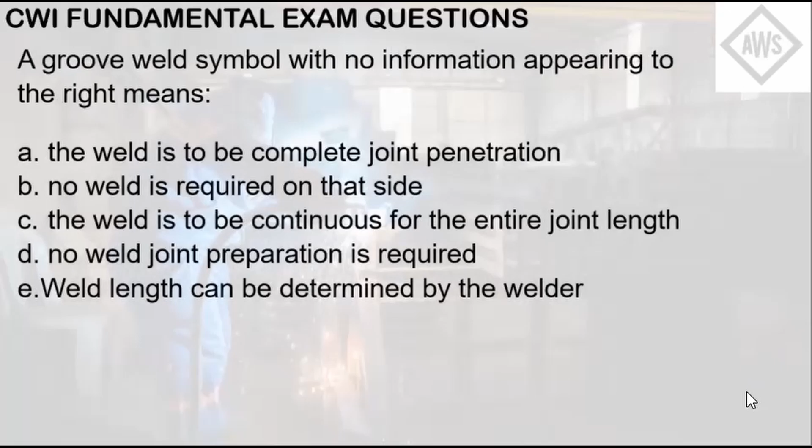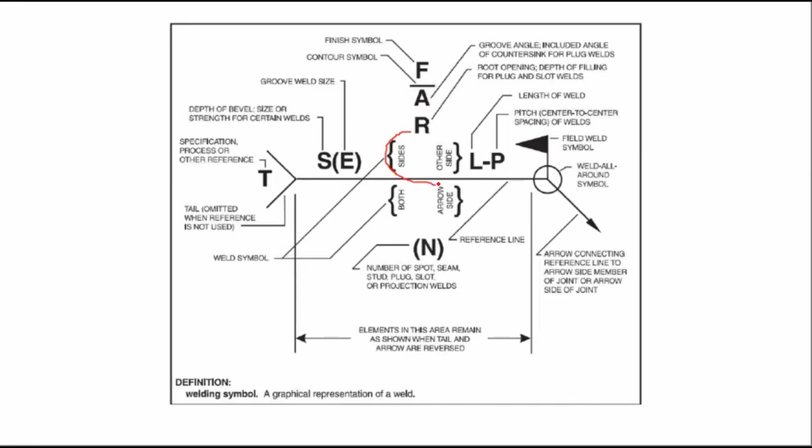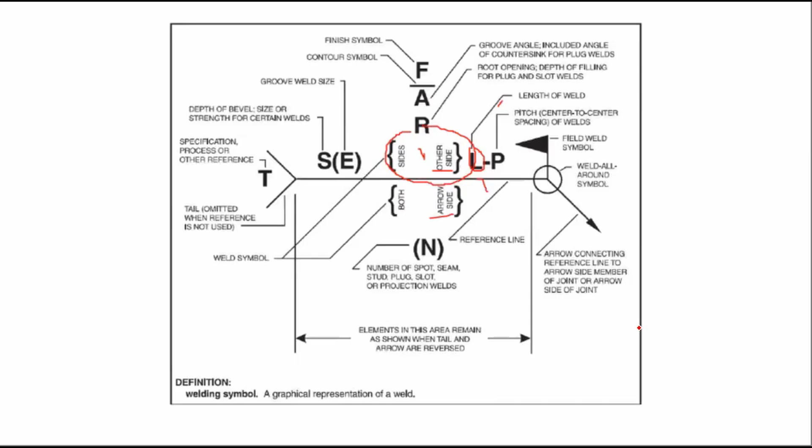As you can see here, the weld symbol is right up in the center. The weld symbol will appear mainly if the weld is on the other side of the joint or the arrow side of the joint. This is the center right here. If you look at the weld length of the weld legend, it's labeled as L, which is the length of the weld. If this is omitted, the length of the weld can be assumed to be continuous for the entire length of the joint. So if you have a joint that is 3 inches, and the length of weld is not specified, then it is understood that the length of the weld is also 3 inches. The answer here is letter C, the weld is to be continuous for the entire joint length.

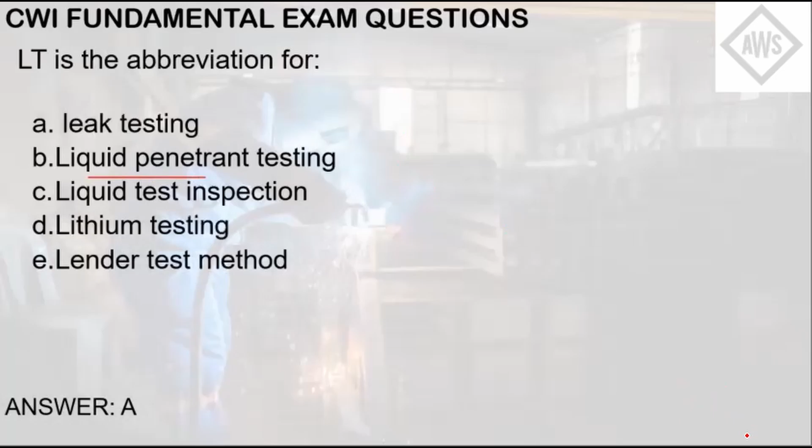So it might be confused with liquid penetrant testing, but the abbreviation for penetrant testing is PT. Leak testing is the answer here. It is a kind of nondestructive testing that fills the vessel or a pipe with a medium, commonly water. It may or may not be pressurized depending upon the testing requirements.

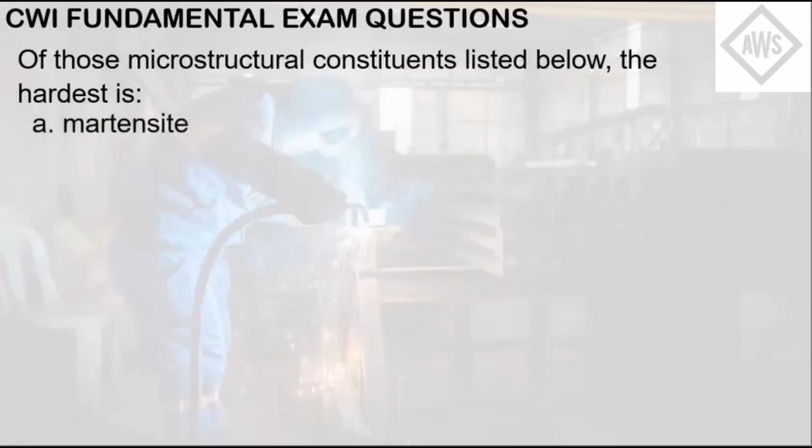Of those microstructural constituents listed below, the hardest is: A, martensite; B, ferrite; C, bainite; D, austenite; E, pearlite. So this question can best be answered if you understand this iron-carbon phase diagram. The question is pertaining to which one is the hardest. This is dependent upon the rate of cooling once the metal is heated.

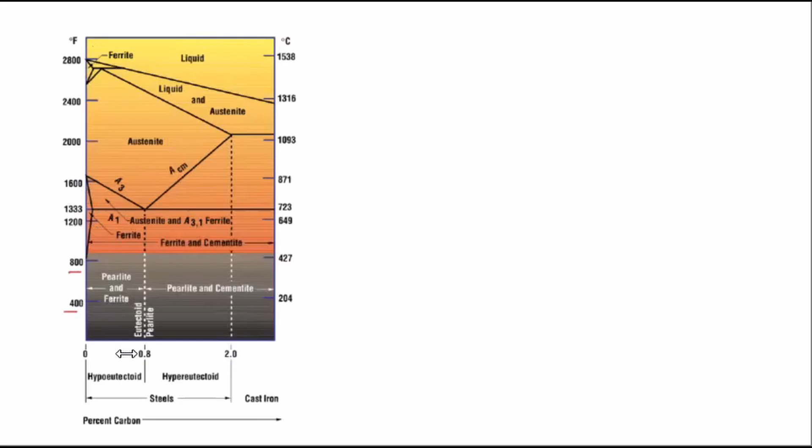So you can see here pearlite, austenite, and ferrite forming at different temperatures. The vertical part of the graph is the temperature. So depending upon their carbon percentage, pearlite and ferrite form at this range of temperature under these carbon percentages. So what about these choices?

Pearlite appears at a normal cooling rate, followed by bainite at a faster cooling rate, because the hardness of the metal depends upon the cooling rate to which it is subjected, and martensite at a very fast cooling rate, typically through a quenching medium. The faster cooling rates will produce a harder but more brittle material due to the reduced grain structure. So the answer here is letter A, martensite.

Filler metal specifications are found in which of the following documents? Letter A, AWS A5.1 through A5.30. Letter B, ASME Section II Part A. Letter C, AWS A3.0. Letter D, AWS A2.4. Letter E, AWS D1.1 Section 2. For the choices, letter B pertains to the forms of ferrous material products. So that is ASME Section II Part A.

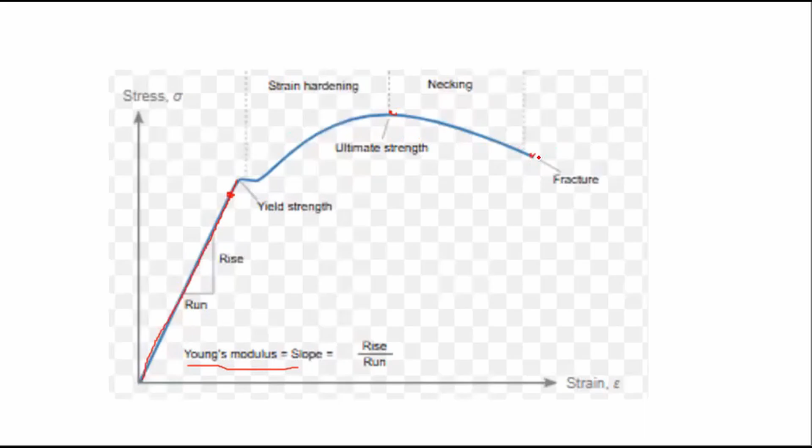All of these points can be determined in a tensile test because the material will undergo this entire stress-strain diagram process, since the tensile test will ultimately break the material up to fracture. So the answer here is letter E, all of the above.

Information that appears to the left of the weld symbol refers to: letter A, weld length; letter B, weld size; letter C, electrode size; letter D, number of passes required; letter E, none of the above.

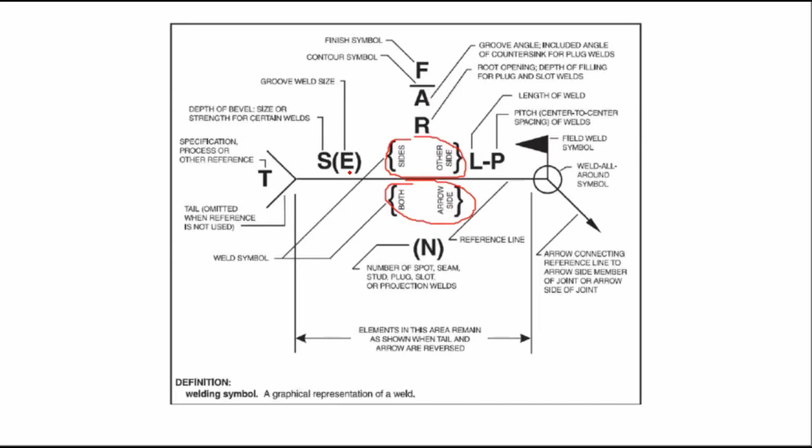So this question can be best explained as well with the diagram here. So the information that appears left of the weld symbol, so again, this is the weld symbol on the center of the welding symbol. So the parameter that appears to the left is the groove weld size or the size of the weld. So among the choices here, weld length appears on the right, so that's not the correct answer. The electrode size you don't specify in the welding symbol, as well as the number of passes. So the answer here is letter B, weld size.

After a rejected weld has been repaired, re-inspected, and found to be acceptable, the welding inspector should: letter A, change the original inspection report to indicate the part's acceptance. Letter B, mark directly on the part. Letter C, fill out a second inspection report. Letter D, tell the foreman to have the part moved to its next operation. Letter E, no further action is required.

So this question pertains to what the welding inspector will do if a rejected weld has already been repaired and found to be acceptable. So letter A, change the original inspection report to indicate the part's acceptance. So maybe this can be done, but this is not the ideal action for this scenario. Letter B, mark directly on the part. So this may be done if the part to be repaired has not been re-inspected yet, if it's yet to be repaired and the rejected weld has not yet been identified.

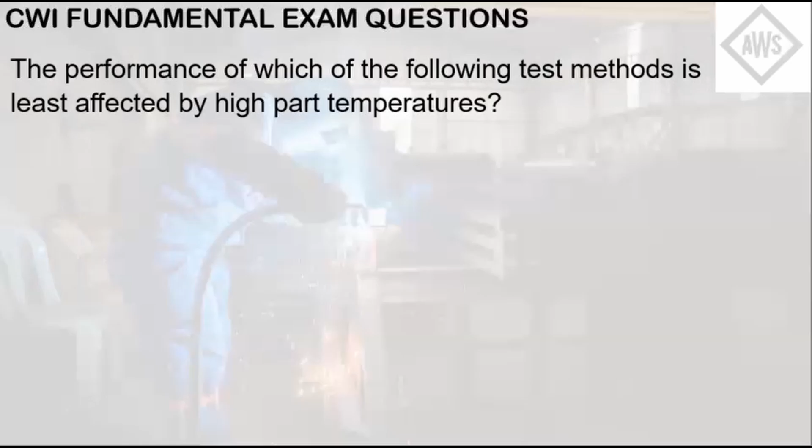The performance of which of the following test methods is least affected by high part temperature? So this question pertains to what testing method is least affected by high part temperature. So basically, after welding, you can expect that the base metal and the welded metal are subjected to a high temperature. So what testing method is least affected by it? Letter A, ET, letter B, RT, letter C, PT, letter D, UT, letter E, VT.

So ET stands for eddy current testing and does not need the probe to touch the metallic specimen. ET is done by a coil carrying AC and works by electromagnetic induction. So because of this, hot parts are facilitated and allowed. But the limitation of this testing is that highly skilled operators are required to operate and interpret the results. So ET is not affected by the high part temperatures of the weld and the base metal.

So for the other choices here, for RT, the high part temperatures can affect the result, especially PT and UT because of the need for contact of the couplant to the base metal or the welded part of the metal. You basically need to have the base metal cool off a bit for safety purposes as well, and of course for visual inspection.

So you need to have the metals cool off a bit. So the answer here is letter A. Since eddy current testing doesn't need contact with the base metal or the metallic specimen, this is the test method that is least affected by those high temperatures of the base metals.

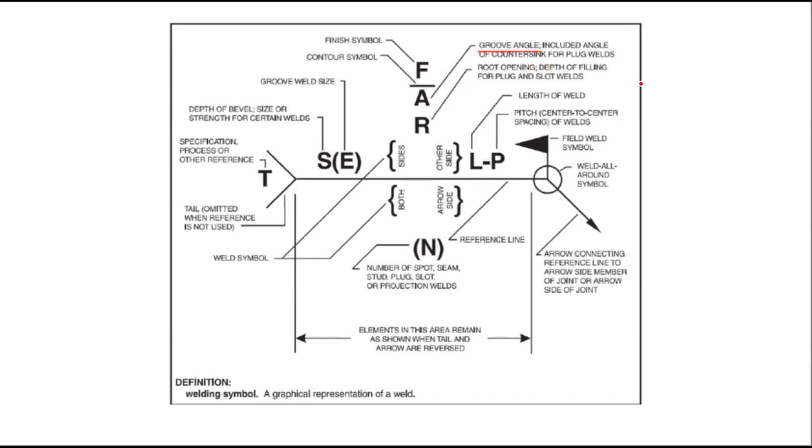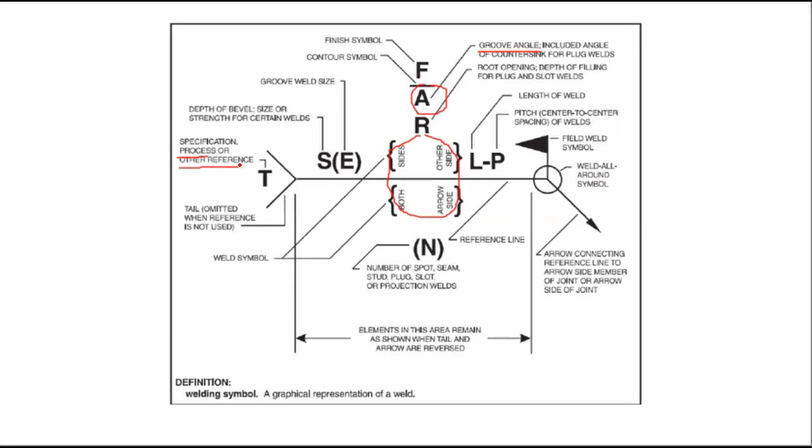The question can be best demonstrated with this illustration. As you can see here, the groove angle is specified at the top of the weld symbol. This is the weld symbol at the center. So this is the groove angle. And the tail is used for specifying processes or other references. It can basically specify drawing references, what welding process it is, among others.

Especially welding process requirements, you can indicate that in detail, even welding procedure requirements, electrode requirements, and welding specification requirements. This can be indicated in the tail. But the groove angle has a specified location in the welding symbol. So the answer here is letter E. Denoting groove angle is not a function of the tail of a welding symbol.

Which of the following may not be detected with VT or visual testing? Letter A, large surface cracks. Letter B, undercut. Letter C, overlap. Letter D, underfill. Letter E, lamellar tear. So for the choices here, large surface cracks, undercut, overlap, and underfill can be detected by visual testing because these commonly occur on the surface of the weld.

A large surface crack obviously can be seen visually. Undercut can be seen visually. Overlap and underfill in the joint root can also be seen visually. But lamellar tear you cannot see; it may not be seen through the naked eye or through visual testing. It is a terrace-like fracture resulting from welding shrinkage, and the three main causes of this are stresses in the through-thickness direction, which is perpendicular to the rolled surface, and susceptible joint configuration, mainly for thicker metals.

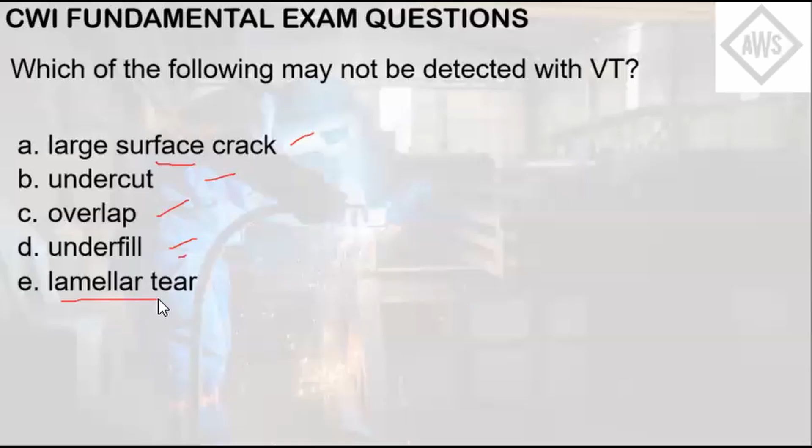One of the reasons it may not be detected with VT is that in thicker metals it may occur underneath the surface, and materials with high inclusion content. So eliminating one of those three causes can reduce the susceptibility of the metals to lamellar tear. So the answer here is letter E.

Which of the following elements are commonly used as alloying elements with tungsten to produce GTAW electrodes? Letter A, cesium. Letter B, thorium. Letter C, columbium. Letter D, vanadium. Letter E, chromium. So thorium aids in improving the electrical characteristics by making the tungsten electrode more emissive. Basically it makes it easier to initiate an arc for TIG welding.

It is most commonly used for joining ferrous metals, hence why it is a common alloying element with tungsten. If I'm not mistaken, thorium is added at 1 to 2% with tungsten to have this effect. So the answer here is letter B, thorium. This is the most common alloying element in producing TIG electrodes.

For single bevel groove weld symbols, the line of the weld symbol running perpendicular to the reference line is always drawn on which side of the weld symbol? Letter A, on the right; letter B, on the left; letter C, on either side depending on company policy; letter D, on the side in which the straight side actually appears in the joint; letter E, doesn't matter.

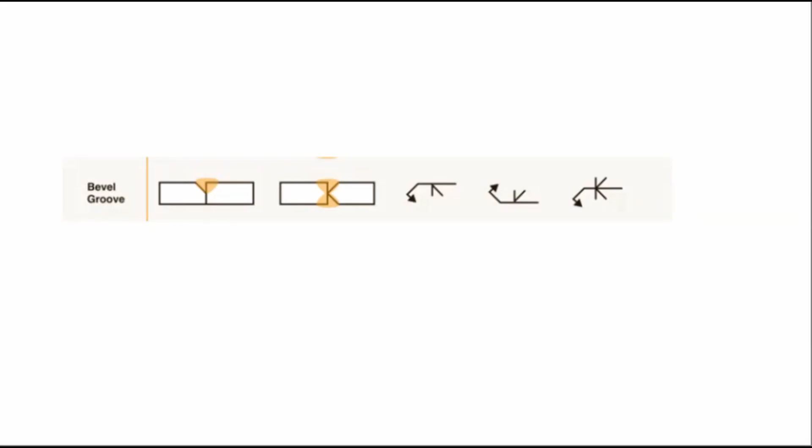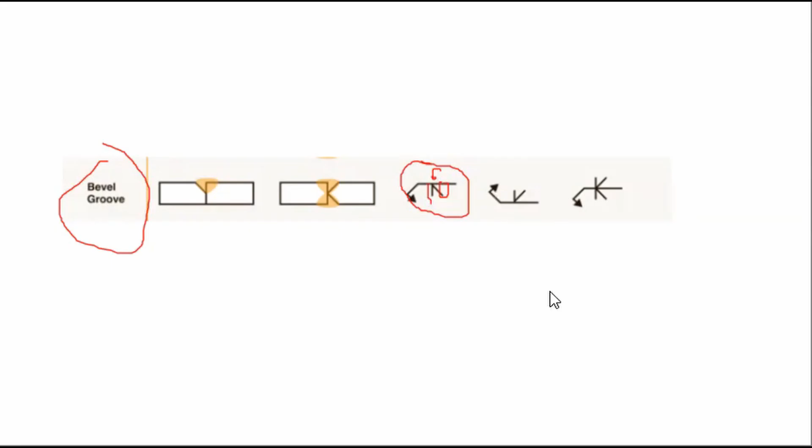So this question can be best demonstrated by this illustration. This is a single bevel groove weld symbol right here. The line perpendicular to the reference line is this part right here, the straight line coming through the reference line perpendicular to it. So it is always on the left part of the weld symbol. So the answer here is letter B.

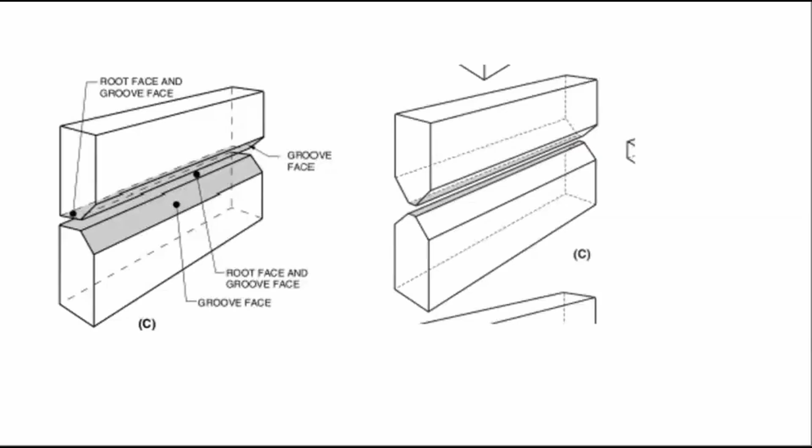The portion of the groove face within the joint root is called: letter A, weld interface; letter B, faying surface; letter C, groove weld edge; letter D, root face; letter E, groove angle. So the joint root here is the shaded part of this figure. This is the root face right here, and the groove face. This entire shaded portion is the joint root. So the portion of the groove face within the joint root is the root face, letter D.

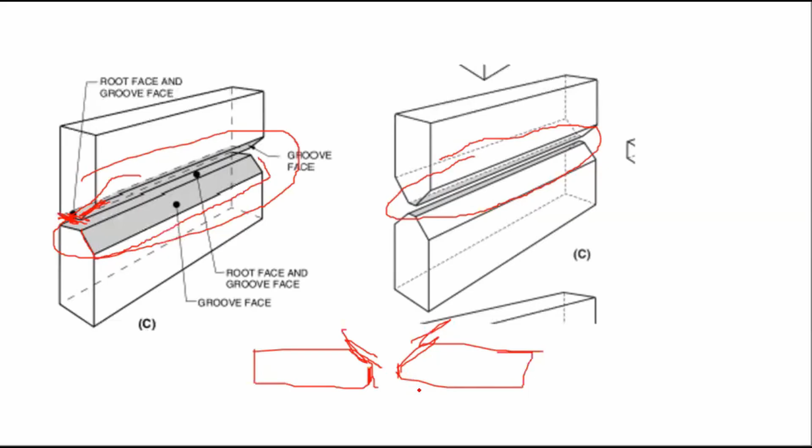As you can see here, this is the entire groove face, and this part here is the root face and the groove face. Basically, they are on the same joint root. The groove face is the face wherein the groove angle is located. So this is the part of the groove face, this part right here. The entire part of this one is the root face and the groove face, and this is the part of the root face. So the answer there is letter D, root face.

Piezoelectricity is a material property used by which NDE method? Letter A, UT; letter B, ET; letter C, RT; letter D, MT; letter E, PT. So piezoelectricity is used in UT, wherein the transducer is attached to an electric base unit. The machine then produces pulses through a coaxial cable that is in contact with the test object through the use of a couplant. For letter B, eddy current does not make use of contact with the metal, unlike UT with couplant. Hence, it doesn't make use of the concept of piezoelectricity.

RT uses radiographic waves. MT uses magnetic field with ferromagnetic material, so you cannot use MT for stainless steels without the presence of iron. Those ferrous stainless steels, you can use it against that. PT uses the concept of capillary action, which makes use of the developer liquid rising through the crevices of the discontinuity or defect. So the answer here is letter A, UT.

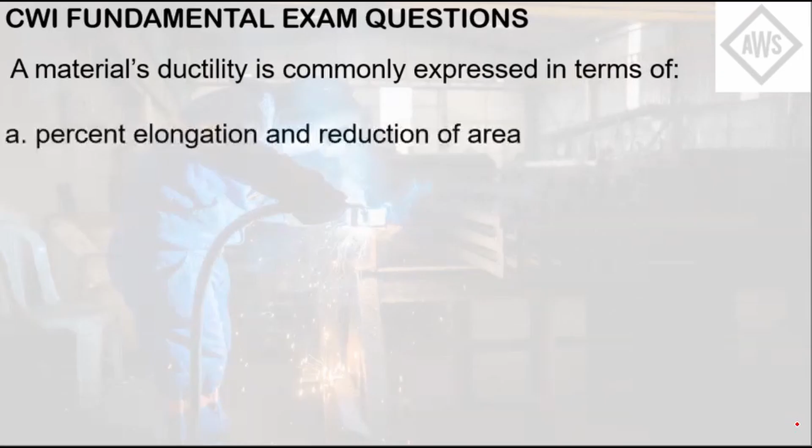A material's ductility is commonly expressed in terms of: A, percent elongation and reduction of area; B, width and thickness; C, tensile strength and yield strength; D, toughness; E, fatigue. Ductility, by definition, is a measure of how much the material can elongate before it ultimately breaks. Letter B is just the measurement, so it doesn't really relate to ductility. Letter C, tensile strength and yield strength, is just the ultimate strength and the yield strength and doesn't measure the ductility of the material. Letter D, toughness, is the resistance of material against impact. And letter E, fatigue, refers to the effect of the repetitive loads imposed on the material.

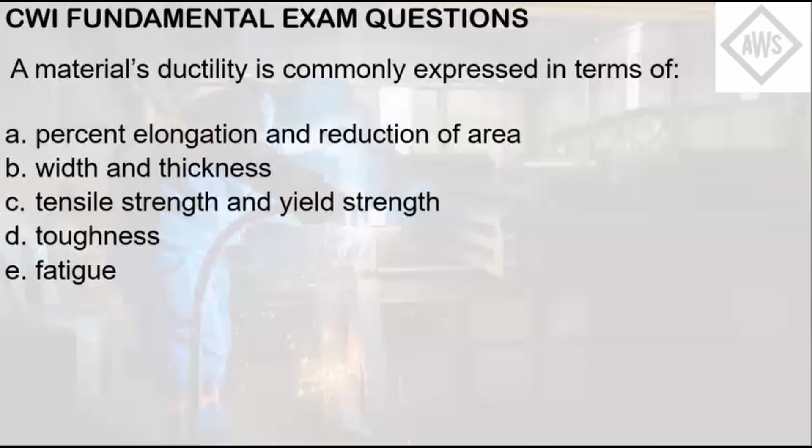So by the definition I mentioned earlier, ductility is measured by how much a specimen elongates before it breaks, hence the reduction of area here. The higher this ratio, the percent elongation and reduction of area, the more ductile the material is. So the answer here is letter A.

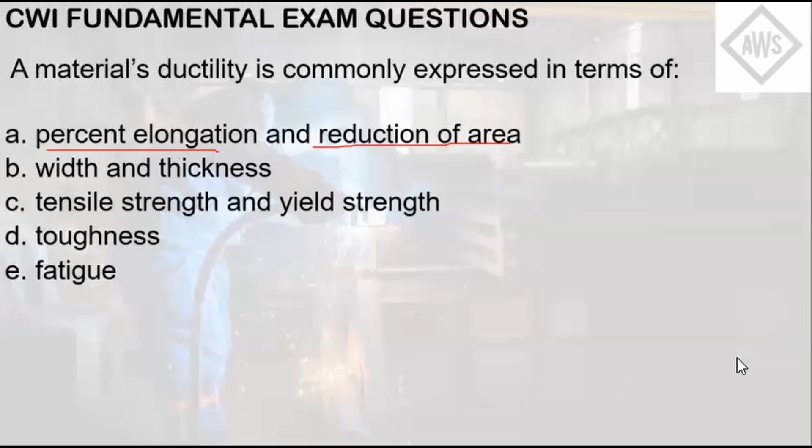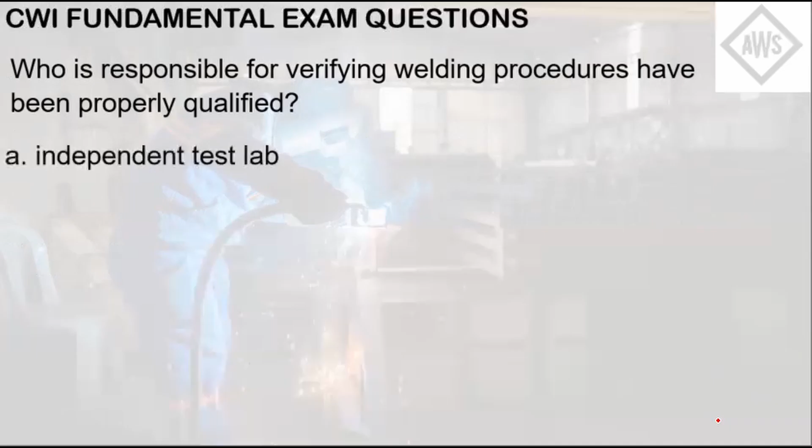Who is responsible for verifying welding procedures have been properly qualified? Letter A, independent test lab. Letter B, contractor. Letter C, welding inspector. Letter D, architect. Letter E, engineer.

So this question pertains to who is responsible for verifying welding procedures. So this is normally a job of a welding inspector. So for the choices here, the independent test lab is just responsible for testing the samples and providing a recommendation if it passed or failed.

The choice for the contractor here is a bit general. So the contractor can do a lot of things here. So the architect and engineers are responsible for the design and not verifying the weld procedures. So the answer here is letter C, welding inspector.

What MT technique could be used for the discovery of longitudinal flaws? So MT means magnetic particle testing. So letter A, coil shot. Letter B, circular magnetization. Letter C, longitudinal magnetization. Letter D, parallel magnetism. Letter E, using a central conductor.

Circular magnetization is used to detect longitudinal flaws. Longitudinal magnetization is for transverse flaws. So if you use circular magnetization, you will not be able to detect transverse flaws, and longitudinal magnetization cannot detect longitudinal flaws. So the answer here is letter B, circular magnetization.

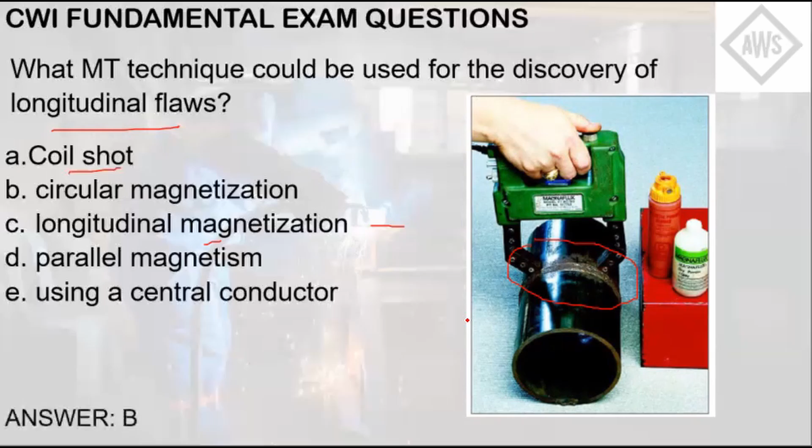Which code gives pre-qualified status to certain weld joint configuration? Letter A, API 1104. Letter B, AWS D1.1. Letter C, AWS D17.1. Letter D, ANSI B31.1. Letter E, AWS B2.1. So let's just run through the codes here.

So API 1104 is for pipelines of oil and gas and petrochemical industries, mainly pertains to the welding of those pipelines. Letter C, AWS D17.1 refers to the specification for fusion welding in aerospace applications. So this is for the airline industry. ANSI B31.1 is for power piping. This is mainly for power plants.

AWS B2.1 is for specification for welding procedure and performance qualification. Standard for any other material with no governing specification. But this code does not give pre-qualified status. So if you have any material here that was not being covered by any other welding standard, you can use AWS B2.1.

So the only code here that gives pre-qualified status is AWS D1.1, the welding code for structural steel. AWS D1.1 welding code for structural steel gives pre-qualified status to certain weld configuration and is found in its clause 3. So the answer here is letter B.

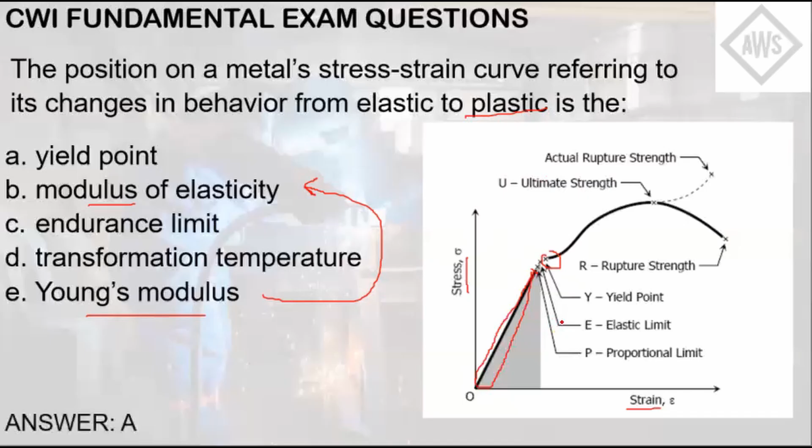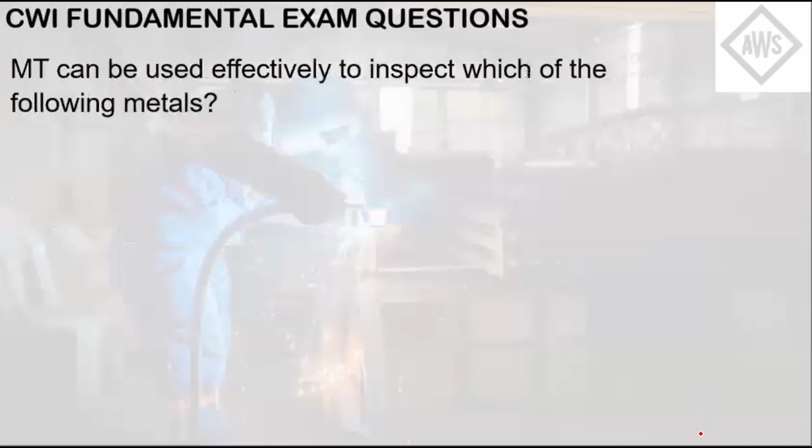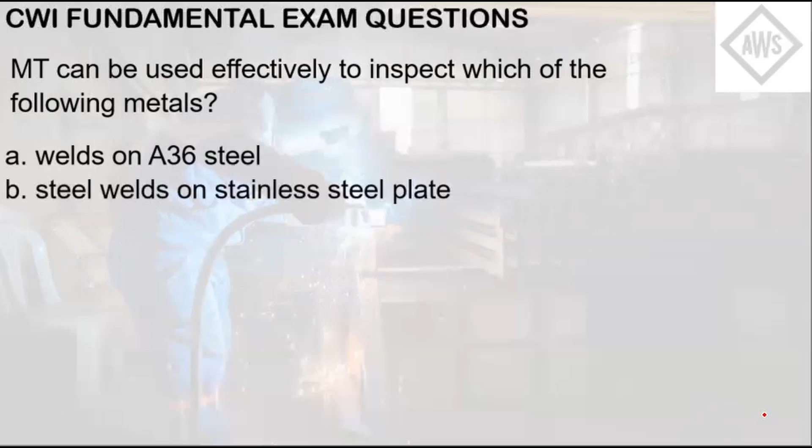Magnetic particle testing can be used effectively to inspect which of the following metals? Letter A, welds on A36 steel. B, steel welds on stainless steel plate. C, welds on aluminum. D, welds on alloy materials. Letter E, materials properly qualified for use with E308 electrodes.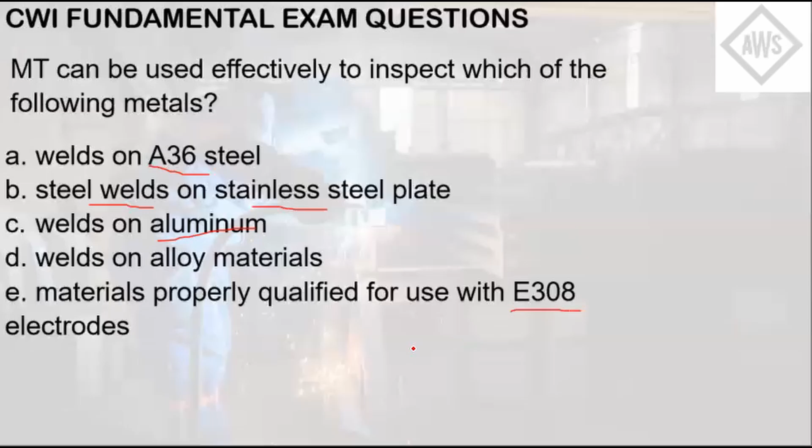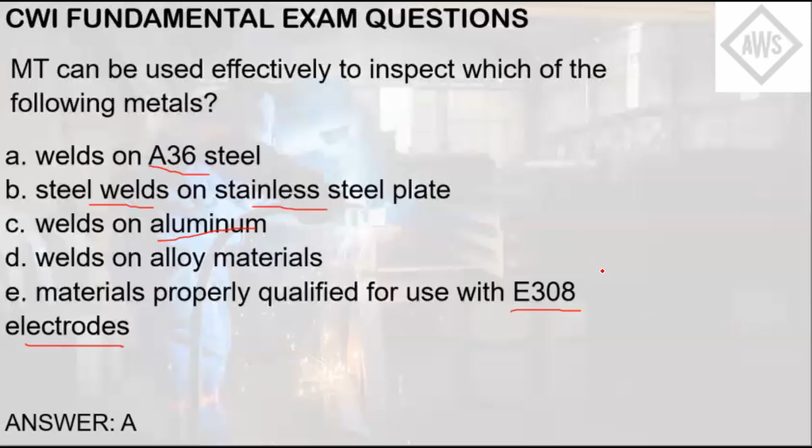Since magnetic particle testing will work effectively on ferrous metals, and A36 is a ferrous metal containing iron, the next question: the use of preheat on a medium carbon steel weld test plate will perform all of the following except: letter A, reduce distortion; letter B, reduce the possibility of hydrogen cracking; letter C, result in the formation of martensite; letter D, produce a wide heat affected zone; letter E, diffuse hydrogen. So what happens when you preheat a medium carbon steel?

Preheat can reduce distortion since the material will not result in a sudden change in temperature. If you preheat that material, when you weld it, it will not be subjected to a sudden change in temperature due to exposure to the atmosphere, or if you subject it to post weld heat treatment. For letter B as well, it will reduce the possibility of hydrogen cracking, because preheat will improve its grain property so cracks will not happen. And because of larger heat input, preheating will produce a wider heat affected zone, or HAZ. Since we have a larger heat input than normal, it will diffuse hydrogen because the heat increases the kinetic energy of hydrogen molecules, increasing their speed and diffusing them to the atmosphere.

Fracture toughness results are often expressed in terms of: A) breaking energy, B) tensile strength, C) percent elongation, D) endurance limit, E) reduction of area.

For the choices here, tensile strength is the capacity of the material before breaking. This is indicated or located as the ultimate tensile strength in the stress strain curve. So we have it right here, before the rupture point.

Percent elongation is also known as strain, or the ratio of the length and the original length - it's basically the strain of the material. Endurance limit is the stress level below which a material can theoretically withstand an infinite number of cycles without failure, so it relates to fatigue failure of the material. Reduction of area is the change in area when the material is subjected to tensile force - imagine pulling a material, and eventually its cross section will be reduced in area.

So the answer here is letter A, breaking energy. This measures the fracture toughness of a material, which can be measured by testing procedures like Charpy notch, Izod, among others.

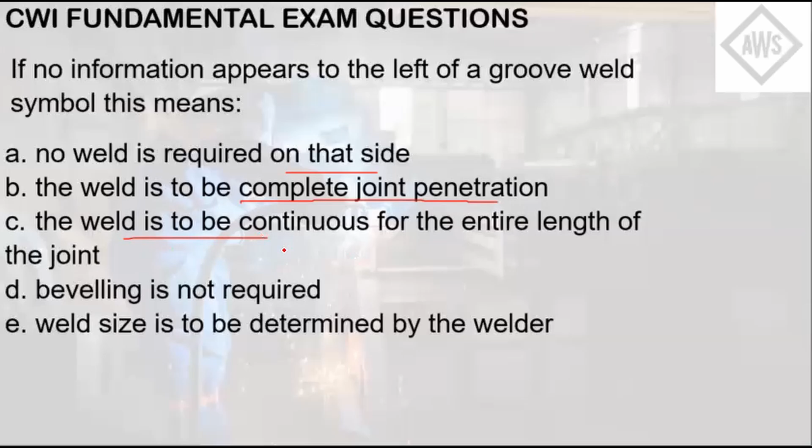When there's a size or number indicated to the left of a groove weld symbol, it means the groove weld does not fill the entire joint. So if there's no information, that means the weld is a complete joint penetration, which is choice letter B. For the choices here, A is false - there is a required weld on that side. For C, there's no information on the right side of the weld symbol; if the weld is to be continuous for the entire length of the joint, that must be indicated on the right of the weld symbol, not the left. Beveling and weld size determined by the welder are false as well. So the answer here is letter B.

To summarize this question: if there's no information on the left of the groove weld, then it is a complete joint penetration. If there's no information on the right of the weld symbol, then the weld is to be continuous for the entire length of the joint.

The property of a material that best relates to its resistance to impact loading is: A) endurance limit, B) fatigue strength, C) fracture toughness, D) tensile strength, E) ductility.

Endurance limit is the stress level below which a material can withstand an infinite number of cycles without failure, so that relates to fatigue strength, which is letter B. Tensile strength is the capacity of the material before breaking, as indicated in the stress strain curve. Ductility is the ability of the material to be deformed or elongate before breaking. The property that best relates to resistance to impact is toughness, fracture toughness - this determines the material's resistance to impact, most commonly with high tensile strength materials and for materials exposed to cold temperature. So the answer here is letter C.

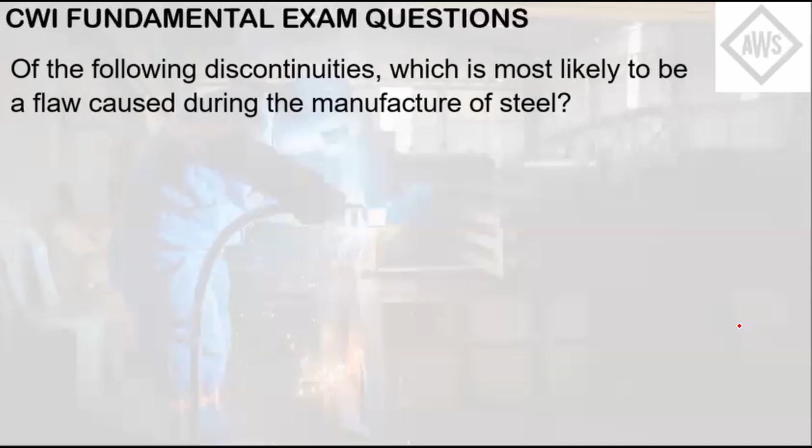Of the following discontinuities, which is most likely to be a flaw caused during the manufacture of steel? A. Porosity, B. Lamination, C. Undercut, D. Crack, E. Inclusion slag.

For the choices here, porosity occurs due to moisture or the presence of hydrogen in the weld. Undercut is where a notch is formed by metal being melted away from the weld zone. A crack is a serious defect that can lead to failure, so there are no acceptable forms of crack. If you see it, it's automatically a defect. Slag inclusion is the inclusion of a material in the weld metal, which commonly forms when there's not enough cleaning in the weld.

For letter B, lamination normally happens when the steel is flattened during the rolling process. So during the rolling process, it can be considered as during the manufacturing process of steel. So the answer here is letter B, lamination.

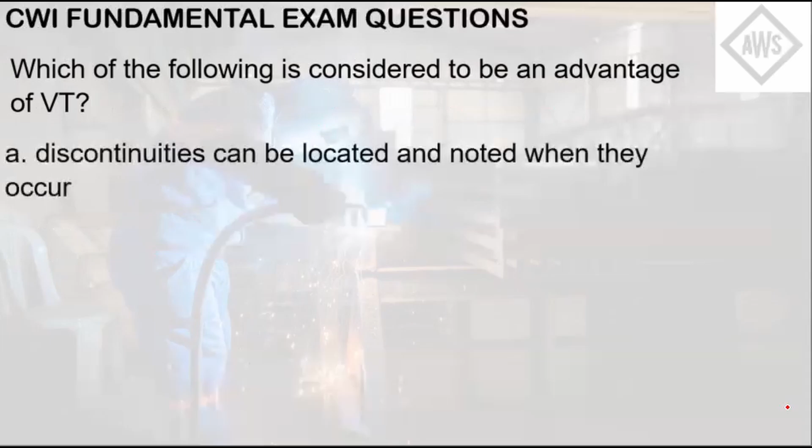Which of the following is considered to be an advantage of VT, or visual testing? Letter A, discontinuities can be located and noted when they occur. Letter B, it is capable of detecting subsurface discontinuities. Letter C, welders can accept their own work. Letter D, equipment can be expensive. Letter E, it can determine material strength.

If you observe here, all of the choices have their own merits, but we have to select the best answer. The big advantage of visual inspection is that it can detect a discontinuity before the welder puts on another pass in the weld, just as an example.

For letter B, it is just not possible with the naked eye and without the assistance of other NDT methods. You cannot detect subsurface discontinuities with your own eyes because it is hidden. For letter C, you want to avoid this. Welders cannot accept their own work because there must be an oversight with the welder's work in order for a proper quality control procedure to happen.

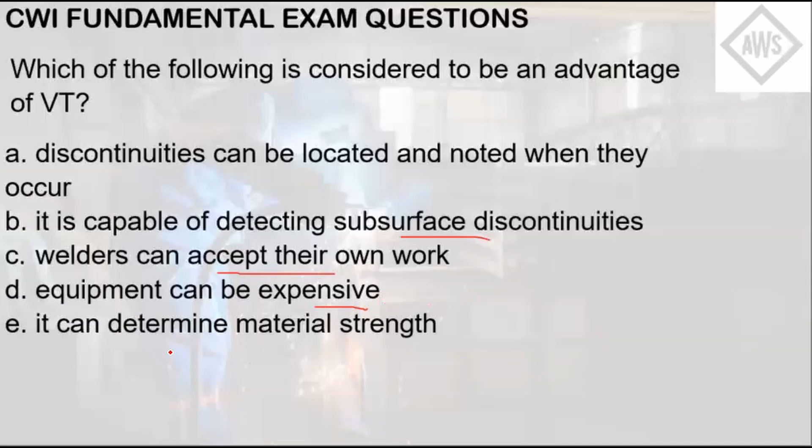Letter D, equipment can be expensive. Yeah, definitely equipment is expensive, but there are other defects best done by, for example, X-ray or RT or UT, just as an example. But this is not an advantage of VT because different NDT methods have their own advantages. This is not the main advantage for visual testing, because there are other more effective NDT methods that are more appropriate for a specific kind of discontinuity to be detected. You cannot determine the material strength by just looking at it. It needs to be tested, for example, subjected to a tensile strength machine. You cannot determine it by just looking at it.

So the answer here is letter A, discontinuities can be located and noted when they occur. That gives value to the entire welding procedure, because you can detect the early signs of failure before it gets hidden by another pass of weld. So you can do that by having a hold point in the inspection test plan if that weld is to be a critical one.

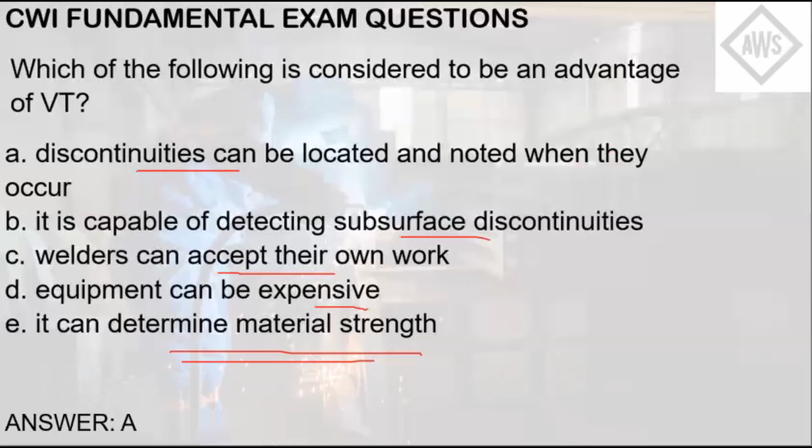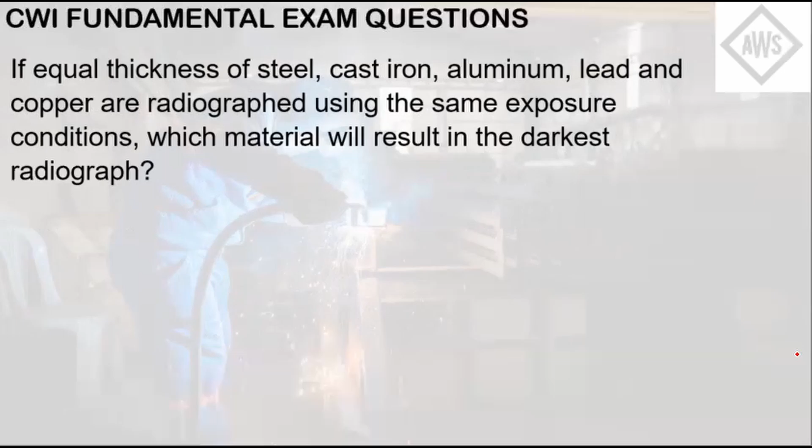If equal thickness of steel, cast iron, aluminum, lead, and copper are radiographed using the same exposure conditions, which material will result in the darkest radiograph? Letter A, lead. Letter B, steel. Letter C, aluminum. Letter D, copper. Letter E, cast iron.

So this question will test your knowledge of the output of these radiographic films. The less dense material will produce the darkest radiograph. This is why hollow points in the radiograph are also the darkest, hence there's discontinuity there. So if there are darker points that you see there, darker indications, that means there are discontinuities in the film.

So if you are familiar with the densities of these materials, you can know that the least dense out of all the materials here is aluminum. So the answer here is letter C. The least dense material will produce the darkest radiograph among these choices.

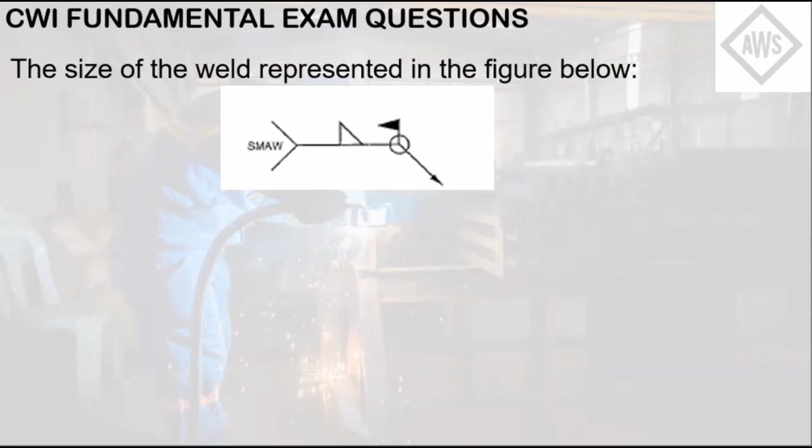The size of the weld represented in the figure below: A, is not important. B, cannot be determined directly from the symbol. C, can be determined from the symbol. D, is not specified, therefore may be determined by the welder. E, must be found in the WPS.

In this question, as you can see, the welding symbol does not have any indication of the number at the left of the welding symbol right here. So it doesn't indicate anything. Therefore, the answer here is letter B. The size of the weld cannot be determined in this welding symbol.

Letter A does not make sense. Letter C is obviously incorrect. Letter D, if the welding symbol is not clear, the welder will definitely ask for the size here. Letter E, the size of the weld may or may not be found in the WPS. So the answer here is letter B.

Welding symbol information provided in the figure below requires: A. Field welding. B. Weld all around. C. A fillet weld. D. The use of shielded metal arc welding. Letter E. All of the above. If you can observe the welding symbol here, this symbol is the symbol of a fillet weld.

This flag right here is a symbol for field welding. The circle right here represents weld all around, and the information indicated in the tail is SMAW, which means shielded metal arc welding. So the answer here is letter E.

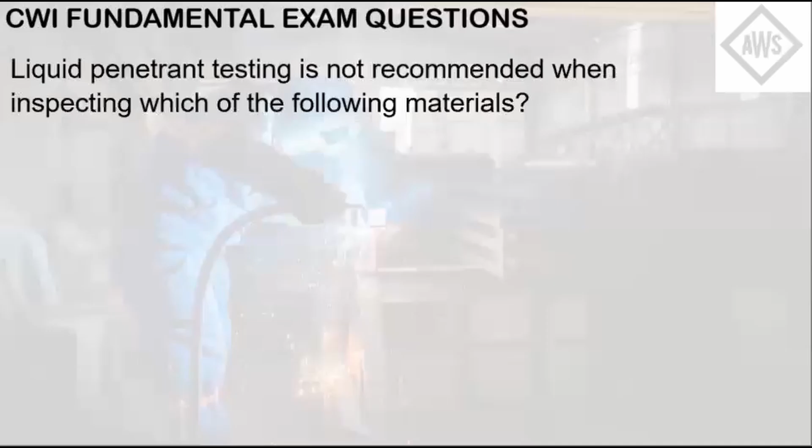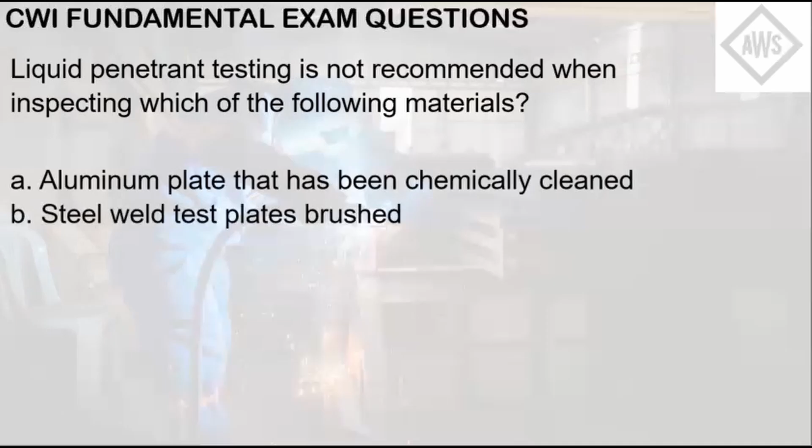Liquid penetrant testing is not recommended when inspecting which of the following materials? Letter A, aluminum plate that has been chemically cleaned. B, steel weld test plates brushed. C, stainless steel pipe as welded by GTAW. D, a casting that has been sandblasted.

A and B are okay, and B is even recommended prior to dye penetrant testing because basically you have to clean these weld surfaces in order for dye penetrant testing to be accurate. It basically keeps the openings of the surface, which is necessary for capillary action. C is also good since austenitic steel can still be inspected by PT. If you're using magnetic particle testing for austenitic stainless steel, you can't do that because it can't be magnetized.

The answer here is letter D, since sandblasting breaks off or peens the surface, which can close the openings in the surface necessary for capillary action. So if you sandblast the surface of a metal, dye penetrant testing will not be possible because you basically closed off all the openings necessary for the capillary action, the liquid rising to the surface, to occur. So the answer here is letter D, a casting that has been sandblasted.

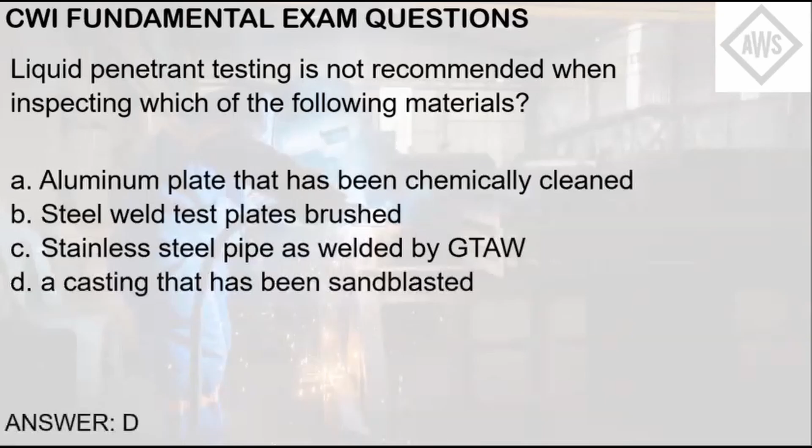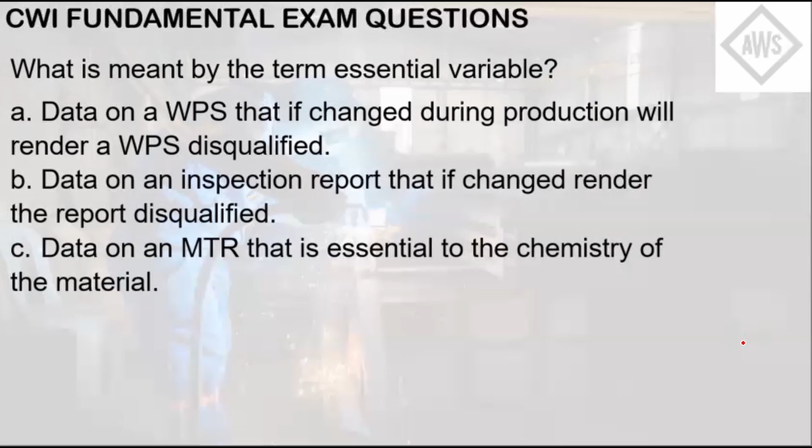What is meant by the term essential variable? Letter A, data on a WPS that if changed during production will render the WPS disqualified. Letter B, data on an inspection report that if changed renders the report disqualified. Letter C, the data on an MTR or material test report that is essential to the chemistry of the material. Letter D, the recommended amperage and voltage for welding as published by the manufacturer. Letter E, describes what should be included in a WPS.

Let me run through the choices here. Letters B and C are automatically eliminated since an essential variable refers to the WPS. A WPS can indicate the recommended amps and volts for welding, but this is not the definition of an essential variable. So you can indicate the recommended amperage or voltage for welding as published by the manufacturer, but this is not the definition of an essential variable.

Letter E, those are not just what's needed to be included in the WPS. So the answer here is letter A. If these essential variables change, then the WPS will be disqualified and you will need to requalify the procedures indicated in the WPS again. So you'll need to retest those procedures that were done, or the results of the procedures that were done during the original WPS, and the variables that were changed.

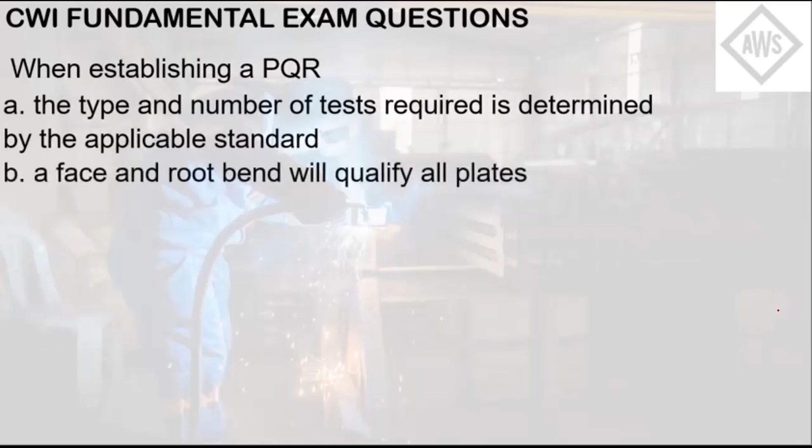Letter B, a face and root bend will qualify all plates. Letter C, testing requirements are determined by the contractor and approved by the inspector. Letter D, destructive testing is required only if a problem is suspected. Letter E, a weld test plate does not have to be mechanically tested to establish a PQR.

I think reading from the choices, you'll definitely have the hunch of which is the correct answer here, because you can almost determine the most reasonable ones. For example, the all-encompassing choices here, like qualify all plates or does not have to be tested, are basically a draconian or nuclear choice, an extreme choice that is over-encompassing every scenario being thrown at you. So that will probably not be the correct answer. So let's run through all of them.

So letter B is not true, since a standard shall determine the qualification. A face and root bend will qualify all plates, not necessarily. It depends upon the standard. Letter C is similar. Again, the contractor, owner, or even the inspector does not dictate this. It's the standard. The inspector is just following the standard.

Destructive testing is required per standard whether a problem is suspected or not. So if the standard, for example, requires you to hydrostatic test that weld or impact test that weld, for structural welds, pressure welds, or if you were welding high stress materials which may require impact tests, then you have to do them. So it's not just when a problem is suspected.

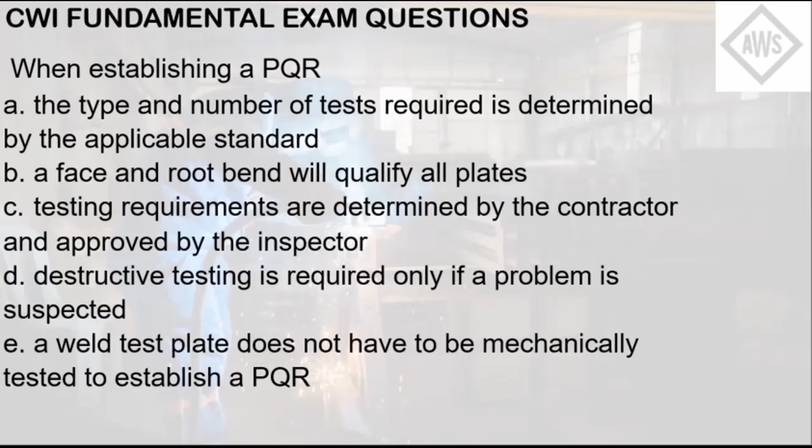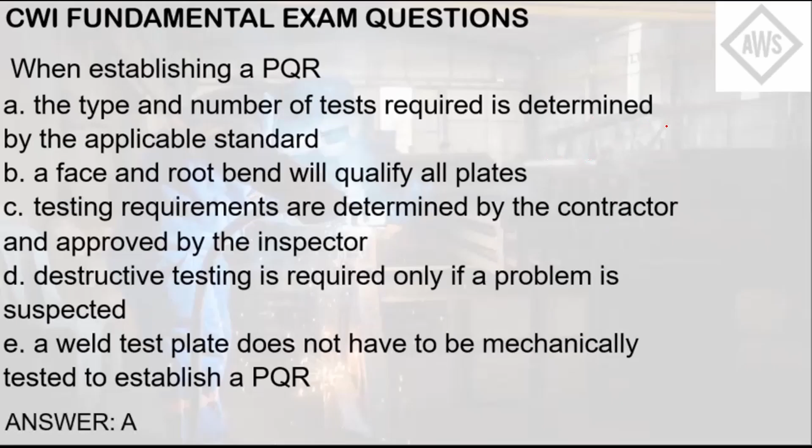So letter E, again, it depends on the standard whether the weld test plate has to be mechanically tested or not, so it's not always the case. So the answer here is again letter A. It depends upon the standard. The type and number of tests required is determined by the applicable standard.

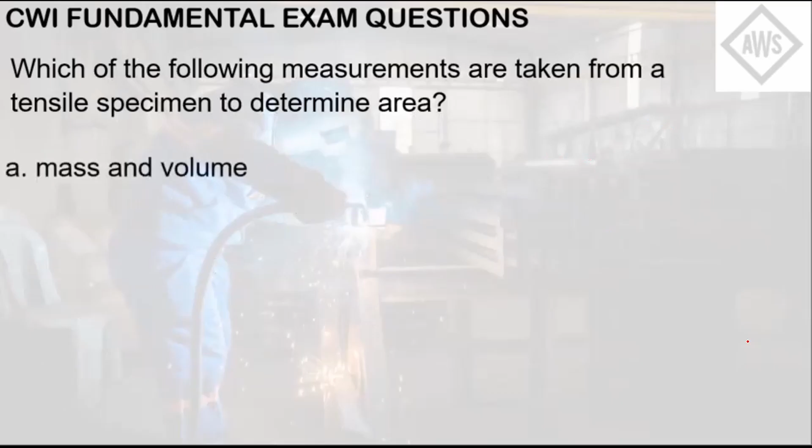So which of the following measurements are taken from a tensile specimen to determine area? Letter A, mass and volume, B, length and thickness, C, width and length, D, width and thickness, letter E, load and pressure. So if you're looking to determine the area from a tensile specimen, you basically have to pull them, right? You have a testing machine and you pull them. So you need to determine the load, the force basically, and the pressure, or the stress capacity of that material, in order for you to determine the area.

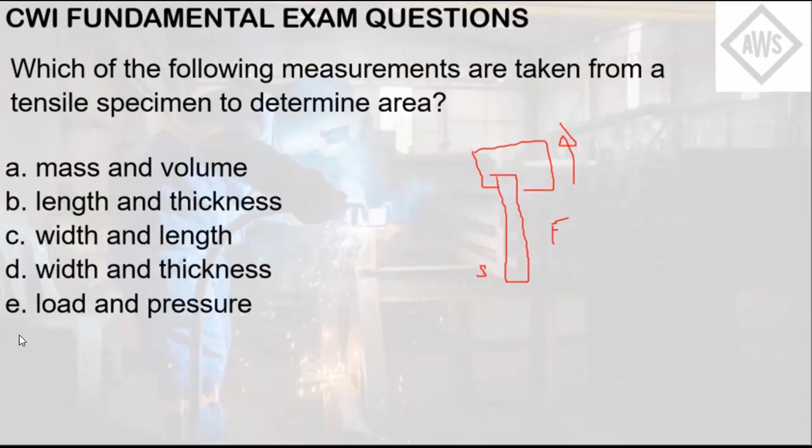So that's the answer here, letter E. It's not enough to have the width and thickness or width and length. Because you're having a tensile specimen there, you need the load and pressure.

Which of the following conditions can cause slag inclusions in a weld? Letter A, insufficient groove angle in an SMAW single V groove weld. Letter B, careful interpass cleaning of subsequent layers and beads of FCAW. Letter C, insufficient preheat of test plate. Letter D, insufficient shielding gas flow in GTAW. Letter E, improper fit up of GMA test plates.

So, insufficient groove angle, due to its narrow space, can often lead to slag being left in the puddle. That happens in SMAW. If you have insufficient groove angle, you have a constrained small area, and most likely slag will be left there because of the tightness of that area. If you're doing careful interpass cleaning, of course, you will reduce the chances of slag inclusion. Insufficient preheat of test plate is not relevant here because it affects the brittleness of the material.

Insufficient shielding gas flow in GTAW. GTAW does not produce slag, so it's tungsten inclusion, not slag inclusion. Same with letter E. It doesn't produce slag, or just minimal production of slag. So the answer here is letter A, sorry. This should be letter A.

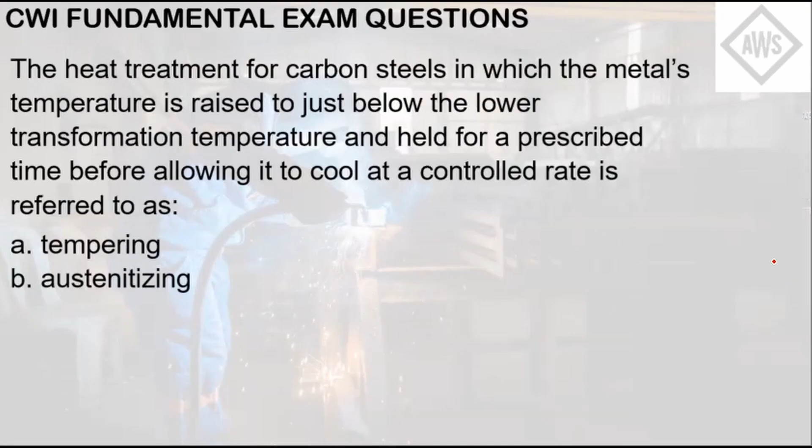The heat treatment for carbon steels in which the metal's temperature is raised to just below the lower transformation temperature and held for a prescribed time before allowing it to cool at a controlled rate is referred to as letter A, tempering, letter B, austenitizing, letter C, stress relieving, letter D, normalizing, letter E, preheating.

So this question refers to a very general term in terms of heat treatment. Let me run through all the choices. Tempering reduces the hardness but in a much more controlled manner than quenching, which improves ductility and reduces brittleness.

Austenitizing refers to where ferrous alloys are heated to transform them into austenite. Normalizing is heat treatment in still air. So for example, if you are heat treating a metal in an oven or a furnace, then you open that oven's door or panel, that is basically normalizing, because you're allowing still air to improve the ductility, but not as much as annealing.

Preheating reduces cooling rate, thus improving properties and preventing the potential for cracking. So with preheating, you basically reduce the cooling rate, thus improving the properties of the metal, preventing it from becoming brittle. So the answer in this question, the more general term here, is stress relieving, letter C. Stress relieving is a general term for allowing metal to cool at a controlled rate.

Next question. Electrical conductivity of a part is the primary requirement for which NDE method? Letter A ET, letter B UT, letter C PT, letter D RT, letter E VT. Electrical conductivity is a main part of eddy current testing, which is the answer here, letter A. UT or ultrasonic testing makes use of high frequency sound waves. PT makes use of capillary action to detect cracks or pores. RT uses X-rays or gamma rays to detect internal or subsurface flaws. VT is visual testing, which makes use of our naked eye or the aid of an instrument to detect surface flaws. So the answer here is letter A.

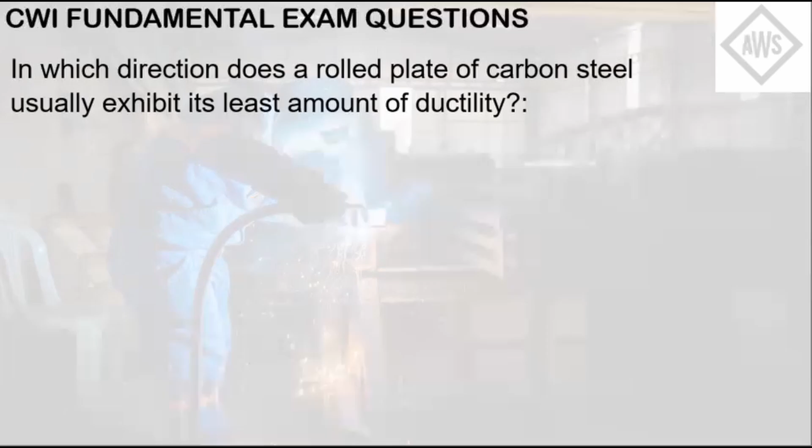In which direction does a rolled plate of carbon steel usually exhibit its least amount of ductility? Letter A, parallel to the rolling direction. B, transverse to the rolling direction. C, in the through thickness direction. D, in the direction of welding. E, rolling direction has no significance regarding ductility.

So this occurs in the through thickness or the z-axis of the plate, meaning the thickness of the plate, because the alignment of grains and inclusions such as sulfides and silicates in this thickness makes it susceptible to lamellar tear. Lamellar tear normally occurs at this through thickness of the plate due to high localized stress, and because it is the area of the plate which exhibits the lowest amount of ductility, making it susceptible to that high localized stress, which in this instance is the lamellar tear. So the answer here is letter C.

Which of the following welding processes commonly use a constant current power source? Letter A, GMAW and FCAW. B, SMAW and GTAW.

C, GTAW and GMAW. D, FCAW and SMAW. Letter E, SAW and SMAW.

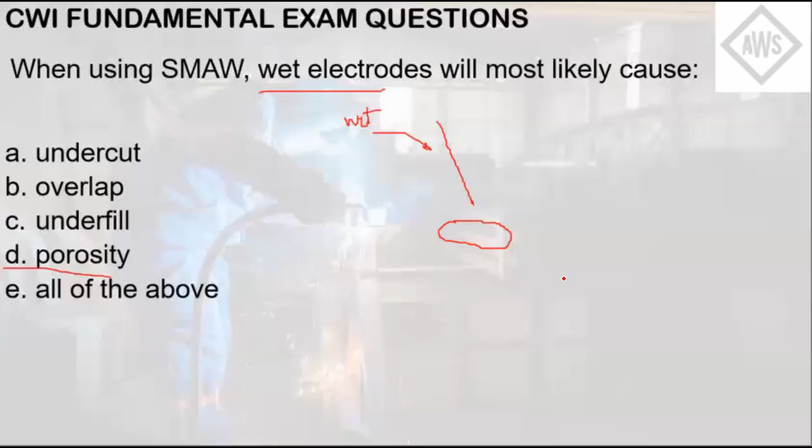I had experience when I was working in the oil and gas industry keeping in mind that the contractors or personnel doing the job are keeping these electrodes at their appropriate storage temperatures. It's some sort of preventative measure to ensure the weld output quality is ensured, preventing such defects or discontinuities. So the answer here is letter D.

Porosity in GMAW can be caused by letter A drafts, letter B contamination, letter C too little shielding gas flow, letter D too much shielding gas flow, letter E all of the above. The question being asked here is about porosity, which can be a discontinuity in this gas metal arc welding process.

Drafts can cause porosities. Drafts is just another term for wind. That's why if field welding is done, proper protection against the elements must be incorporated, like tents or similar shelters.

Contamination can also cause porosity, not just in GMAW. If you have dirt or other contaminants in your weld puddle, that will cause porosity as well. Too little shielding gas can cause moisture and unwanted gases to penetrate the molten puddle, thus causing porosity. If you don't have enough shielding gas flow, the weld puddle will not have enough protection to deter all the gases coming in that can be detrimental to the weld process.

Also, too much shielding gas flow can cause porosity. Why is that? If you have too much flow, it can create a vortex that induces vacuum conditions around the weld puddle, which will cause it to suck gases into the weld puddle and cause porosity later on. So too much is also not good. It should be the right amount as specified in the welding procedure specifications. So the answer here is letter E, all of the above.

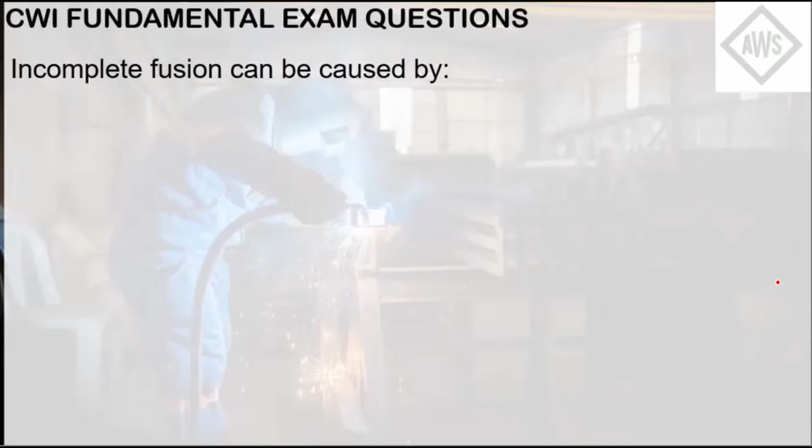Incomplete fusion can be caused by: A) not preheating, B) not filling the joint completely, C) improper gas shielding, D) poor fit up, E) excessive amperage. Incomplete fusion here is affected by poor fit up, so the answer is letter D, as the misalignment caused by it leads to the base metal not being completely fused. If you don't properly align your two base metals, you'll not completely fuse the metal altogether. Preheating affects the grain structure and weldability - it affects the heat input, so you mainly use preheating for harder metals for it to be more weldable. Letter B, not filling the joint completely, is incomplete joint penetration, which is acceptable depending on the design. Improper gas shielding causes porosity and other discontinuities, but not incomplete fusion. Excessive amperage causes excessive heat input, with the tendency of melting the base metal, which is not incomplete fusion altogether. So the answer here is letter D, poor fit up.

Developing is one of the steps in which NDE method? A) UT and ET, B) RT and PT, C) PT and MT, D) MT and ET, E) VT and PT.

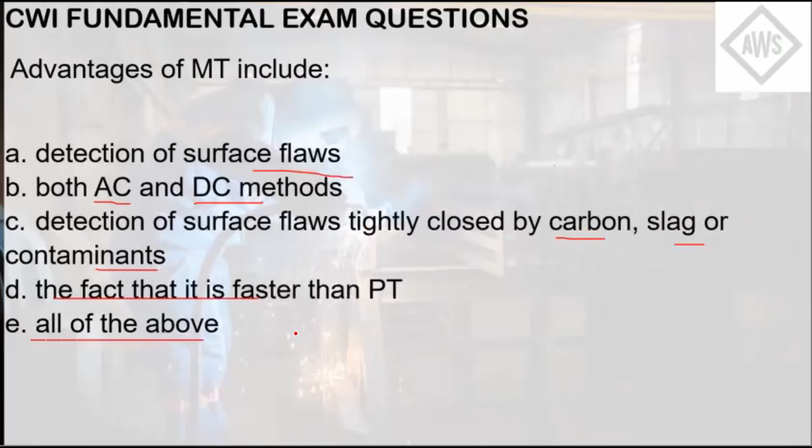Ultraviolet light may be used with which NDE methods? Letter A, VT and UT. Letter B, PT and UT. Letter C, MT and PT. Letter D, RT and UT. Letter E, ET and MT. The answer here is letter C, because ultraviolet light can make surface flaws stand out because it brightens up the indication or the discontinuity itself.

Couplant is that fluid that is applied to the transducer that helps the transmission of sound waves, similar to ultrasound imaging. So the answer here is couplant,

letter C. Which process uses a granular flux that can be manually added to the weld pool? Letter A, SMAW, letter B, GTAW, letter C, ESW, letter D, SW, letter E, FCAW. So for the acronyms here, SMAW is shielded metal arc welding or stick, GTAW is TIG, SW is stud welding, FCAW is flux core, so there's no manual flux in there. The flux is in the electrode.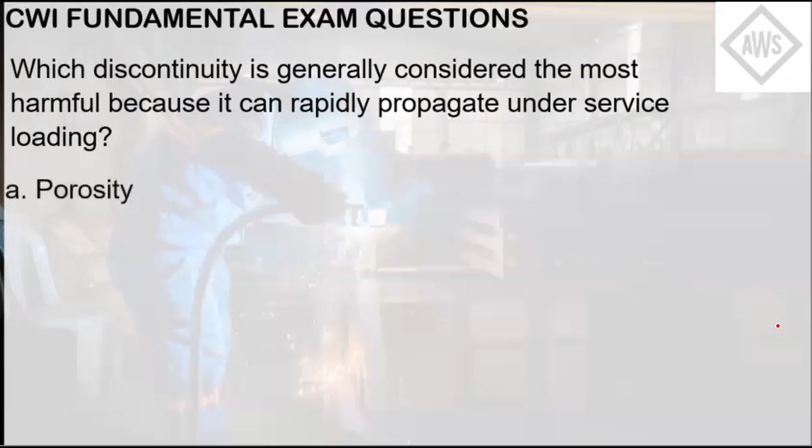Which discontinuity is generally considered the most harmful because it can rapidly propagate under service loading? Letter A, porosity. Letter B, slag inclusion. Letter C, crack. Letter D, undercut. Letter E, spatter. So the answer here is letter C, crack. So this is the most harmful discontinuity because it doesn't have any acceptable limits. If you have a crack in the weld, that's an automatic defect.

So it is considered a linear discontinuity and creates severe stress concentration. So if you have a stress concentration, that will produce the maximum induced stress on that material. I don't know any welding code that has an acceptable limit for crack; most welding codes don't have any acceptable limits for crack, so it rejects. If you have a crack in the weld, that's an automatic rejection.

Porosity reduces strength but is usually less severe than cracks. Slag inclusion for stick welding or other processes can reduce strength but is generally less critical. So these have an acceptable limit depending on the code. Undercut can be acceptable within code limits, and spatter is merely aesthetic. So you'll get away most of the time with the spatter. So the answer there is letter C, correct.

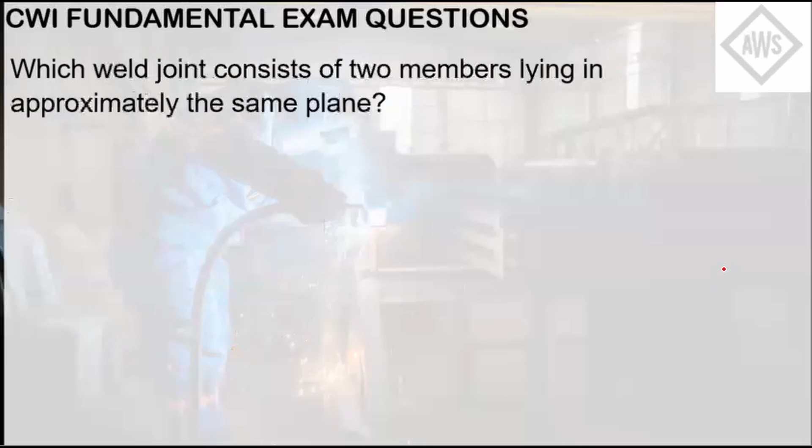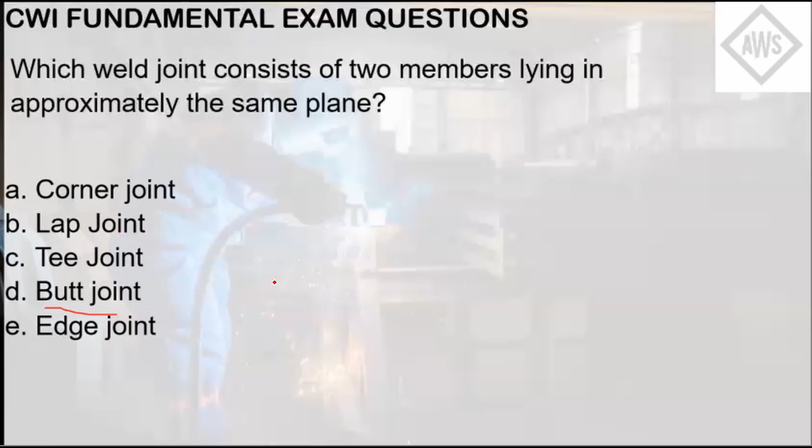Which weld consists of two members lying in approximately the same plane? Letter A, corner joint. Letter B, lap joint. Letter C, T joint. Letter D, butt joint. Letter E, edge joint. So a corner joint is L shaped. A lap joint is an overlap between two members. Letter C, a T joint is T shaped. An edge joint is joining parallel edges. So a butt joint is same plane, joined edge to edge. So the answer there is letter D, butt joint.

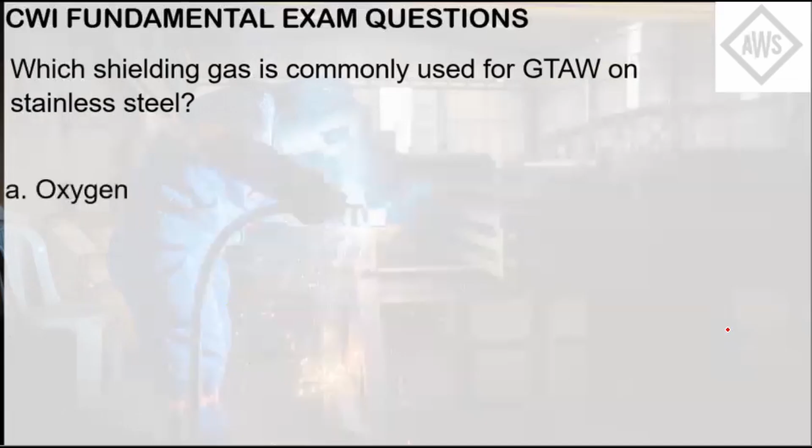Which shielding gas is commonly used for GTAW on stainless steel? Letter A, oxygen. Letter B, nitrogen. Letter C, argon. Letter D, carbon dioxide. Letter E, hydrogen. So you don't use oxygen for GTAW, especially for stainless steel. It's too reactive. Nitrogen, you don't use it alone. It's mainly used for purging, and commonly mixed with other gases.

Carbon dioxide is mainly used for MIG. Hydrogen is for very limited use only. So the answer here is argon. That is the most commonly used for TIG welding, especially for stainless steel.